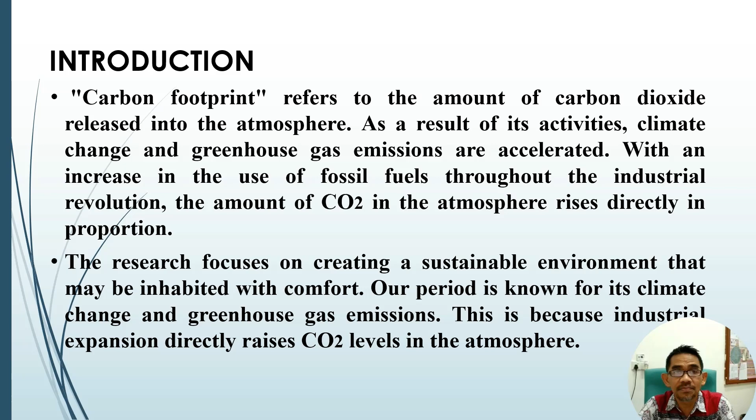The purpose of this research is to inspect the carbon footprint in the buildings of Polytechnic Kuching Sarawak institution and to use the data collected in obtaining a sustainable environment.

The objectives of the research are: determining the carbon footprint in the concrete and welding lab by using air detector; number two, the relationship between carbon dioxide emission with heat and thermal, and to collect the correlation of temperature, humidity, lux level, and air velocity of the concrete and welding lab.

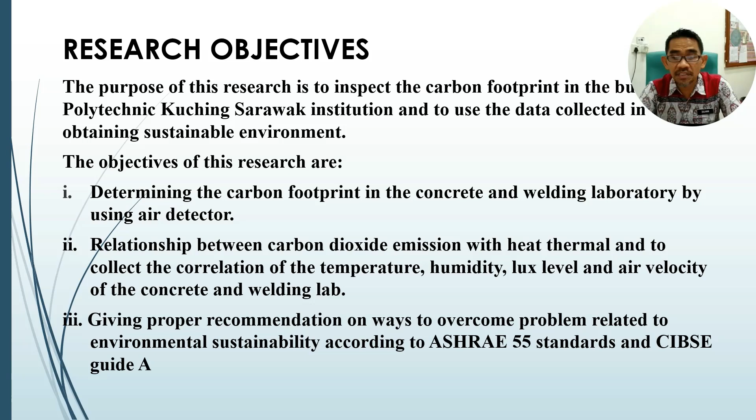And lastly, giving proper recommendations on ways to overcome problems related to environmental sustainability according to ASHRAE 55 standard and CIBSE Guide A.

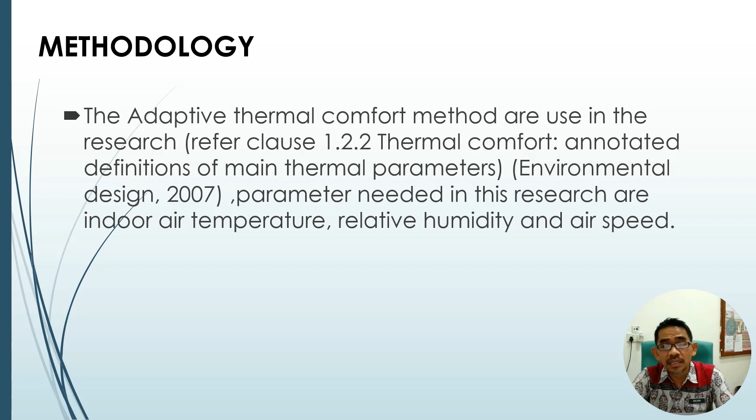Next, we go to the methodology section. The adaptive thermal comfort method is used in this research, referring to clause 1.2.2 thermal comfort and the definition of main thermal parameters in Environmental Design 2007. The parameters needed in this research are indoor air temperature, relative humidity, and air speed.

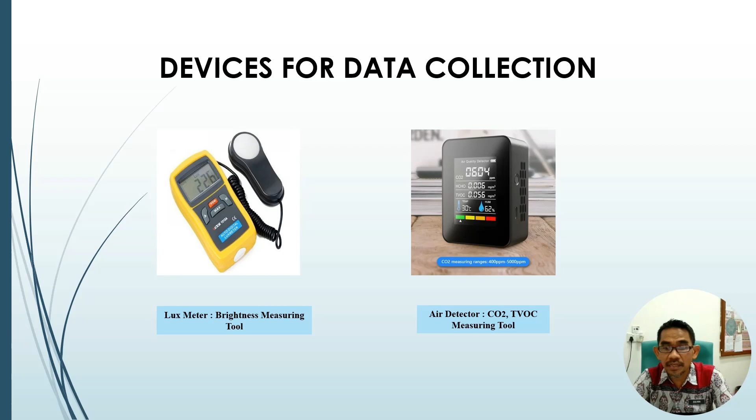These are the devices used for data collection. The first one is the lux meter, a brightness measuring tool, and the second one is the air detector, a CO2 and TVOC measuring tool.

The zone typically occupied by people within a space is considered 1.8 meters above the floor, more than 1 meter from outside walls or windows, and 0.3 meters from internal walls.

Points of data collection are around 4 to 20 locations, depending on the area being accessed. To be specific, the time accessed was approximately 15 minutes or more, based on the device used.

Variables collected for data are minimum and maximum temperature for hot and cold, lux level, air velocity, carbon dioxide level, TVOC, temperature, and humidity.

After all the data is collected, the average of each variable will be calculated. Then, average data of temperature will be compared to average data of air speed to see the relation between both datasets. The total calculated data will then be compared to the ASHRAE 55 standard of thermal comfort.

OSHA and Jabatan Kerja Raya standards will also be used to give recommendations for a sustainable environment.

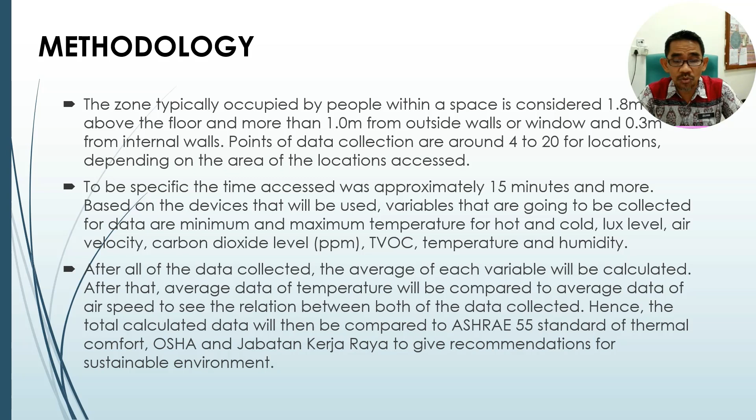Next, we go to the results and analysis section.

Concrete lab is where a student will do practical tasks such as mixing concrete, evaluating the quality and quantity of concrete, and fabricating precast concrete.

Based on the table of concrete lab data collected from 12 points, it has an average minimum and maximum temperature of 28.9 degrees Celsius and 32.2 degrees Celsius respectively. It has a minimum cold temperature of 28.8 degrees Celsius and a maximum cold temperature of 33.8 degrees Celsius.

The average lux intensity is 304.17 lux. The average velocity is 0.16 meter per second, whereas the carbon dioxide level is 519.33 ppm and TVOC is 0.089 milligram per meter cube with a temperature of 26.92 degrees Celsius as well as humidity level of 77.17%.

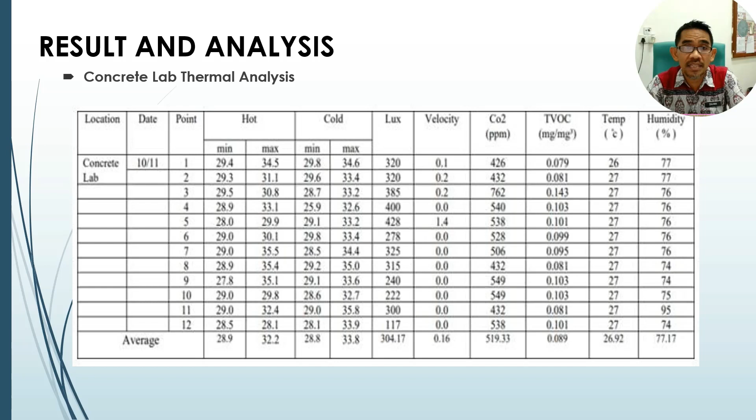Welding lab provides a hands-on learning environment where students may practice arc welding, MIG welding, and other welding techniques. Despite being situated in the same structure, this welding lab includes a number of distinct rooms.

Based on the table of welding lab data collected from 20 points, it has an average minimum and maximum hot temperature of 29.7 degrees Celsius and 35.4 degrees Celsius respectively, a minimum cold temperature of 32.6 degrees Celsius and a maximum cold temperature of 37.6 degrees Celsius.

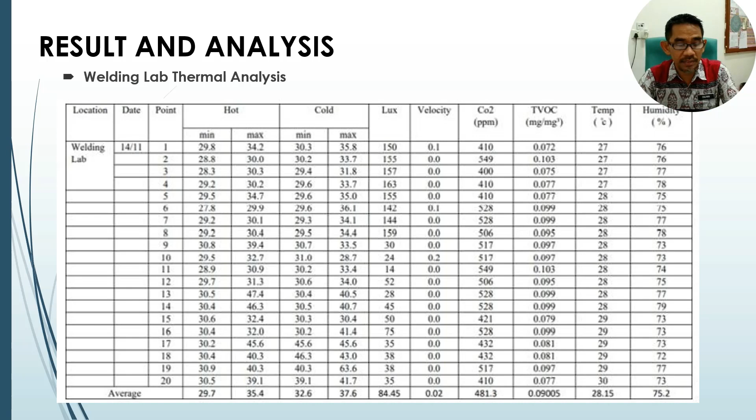The average lux intensity is 84.45 lux. Average velocity is 0.02 meter per second. The carbon dioxide level of 481.3 ppm and TVOC of 0.09005 milligram per meter cube with a temperature of 28.15 degrees Celsius as well as humidity level of 75.2%.

Then we go to discussion. According to OSHA regulation, carbon dioxide level between 1,000 and 2,500 parts per million may produce general drowsiness. Ventilation rate should be maintained below 1,000 ppm of carbon dioxide in order to ensure acceptable indoor quality condition for the vast majority of individuals.

In terms of the concrete lab and welding lab, it complies with the OSHA requirement for levels that are regarded acceptable. According to ASHRAE 55-2010, the comfort zone for an environment that fits this standard has a speed of less than 0.2 meter per second.

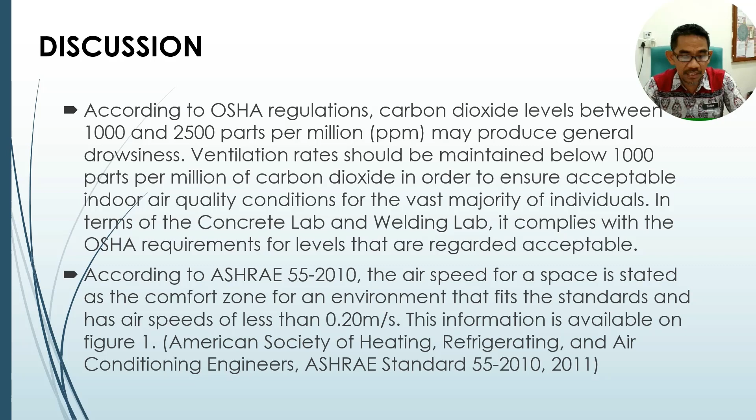This information is available on Figure 1, American Society of Heating, Refrigerating, and Air Conditioning Engineers, ASHRAE Standard 55, 2010-2011.

Both the concrete lab and welding lab have a velocity of less than 0.2 meter per second, having previously been 0.16 meter per second and 0.02 meter per second, respectively. So the average air speed estimated for both accessible sites meets the ASHRAE 55 guideline, indicating that the facilities are appropriate for occupation.

Based on ASHRAE 55 parameters as plotted in this cross-section diagram, the temperature of the concrete lab is 26.92 degrees Celsius with air velocity of 0.16 meter per second, and for welding lab, the average temperature is 28.15 degrees Celsius and air velocity is 0.02 meter per second. Both of the buildings do not meet the requirement standard of

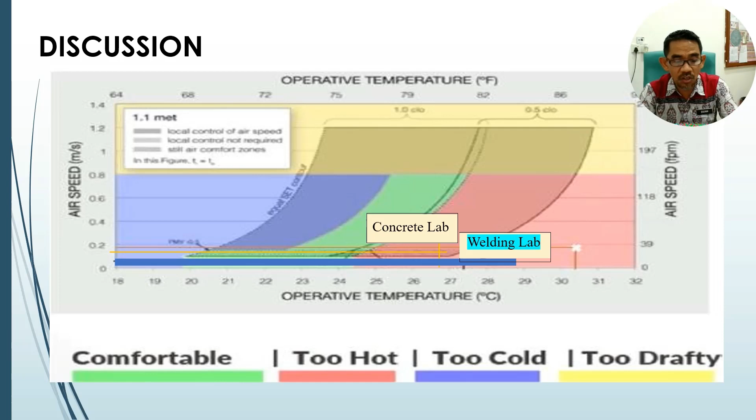ASHRAE 55 thermal comfort as they are considered too hot. The yellow colored line indicates the thermal comfort for concrete lab, while the blue colored line indicates the thermal comfort of welding lab. As a conclusion, this study clearly showed that the heat thermal energy, air velocity, and humidity does contribute to carbon footprint.

The result revealed that the average carbon dioxide level of the concrete lab, 0.089 milligram per meter cube, is 519.33 ppm, and welding lab is 0.09 milligram per meter cube, is 481 ppm.

Referring to the air quality index, the acceptable ppm value is below 500 to 1000 ppm. Both accessible sites had calculated average air speed that matched ASHRAE 55, suggesting that the places are suitable for occupancy. Air velocity in both labs is less than 0.2 meter per second. Therefore, overcoming this issue is crucial in order to build a sustainable environment for future generations.